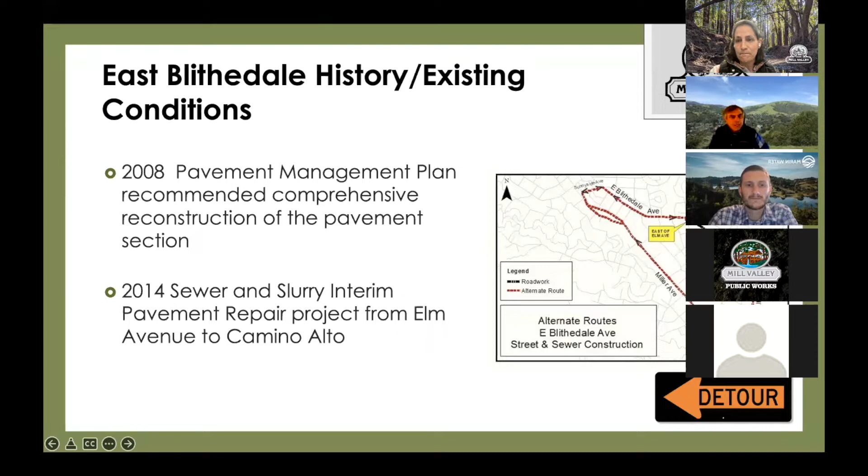I'd just like to give a quick background on Blithedale. Since 2008, the pavement rehab is kind of well overdue for repair, since the pavement program recommended at that time a full overhaul of the roadway condition on Blithedale. Since then, we only did some minor slurry rehab and some sewer work in 2014, and at that time traffic was also detoured for the project to Miller and did a complete detour. So that's it. Next.

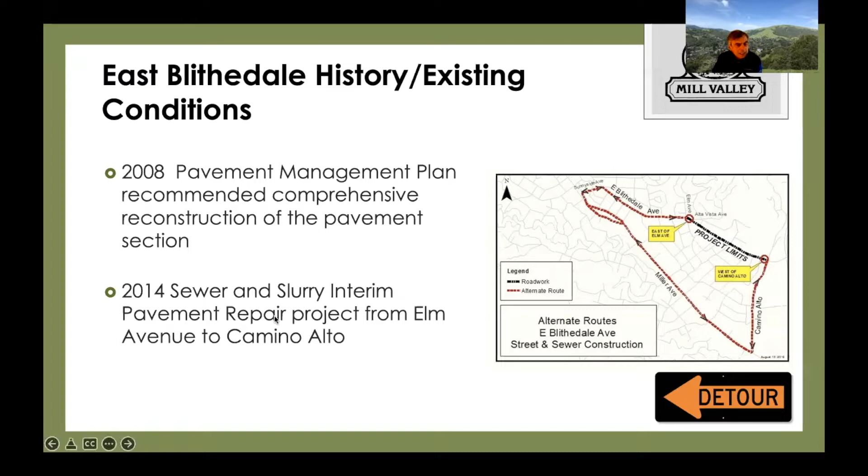The project in general is the Blithedale project, designated to be a complete street. We kept that in mind and used it as a guiding principle. The goal is to improve mobility for traveling in the Blithedale corridor, providing a safe and comfortable transportation system with more options for everyone, regardless of age, ability, ethnicity, or income.

In general, it includes pavement rehab, American Disability Act upgrades, new curb and gutter, sewer improvement, and pedestrian and bicycle facilities. The project will provide ADA compliant ramps, rapid flashing beacon crosswalks, wider sidewalks, bike lanes, street marking, and extended curb bulb outs similar to the downtown area.

On the bike route and the phases - I'm sorry, let me go back again to talk about the phases. I just want to talk about the project limits.

As you see in blue is the first phase of the project, which started last summer from Highway 101 to Amicita. All the underground work is substantially completed, and we're looking at paving in mid-May, overnight in the evening hours.

The second phase will go from Amicita to Elm, and the third phase from Elm to Sunnyside. We also included Sunnyside pavement rehab from Miller to Blithedale, as well as Sycamore Avenue from La Goma to Blithedale. So that's the limit of the project.

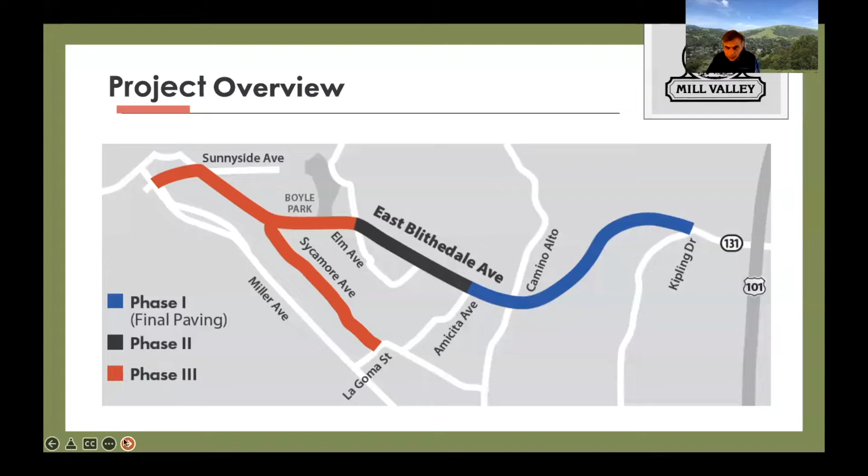So go to the next slide. As you can see, the project is basically almost like five projects included in one.

The first work that we see going right now in Blithedale is actually not a city project, but Marin Water District, who's been a great partner with us on this project. They are in the process of replacing the 100-year-old water line in advance of our paving on the roads, so we really appreciate that. They've gone through hoops to try to get the project going early before our project and get that going, so we appreciate that.

They are starting with our project and moving forward with that. In addition, PG&E is also a partner for this project and is looking at doing some work right now, potentially, which is not confirmed yet. They'll be looking at doing some pipe replacement from Elm Street onward, with a number of gas lateral services to be replaced. So we'll get more information on that soon.

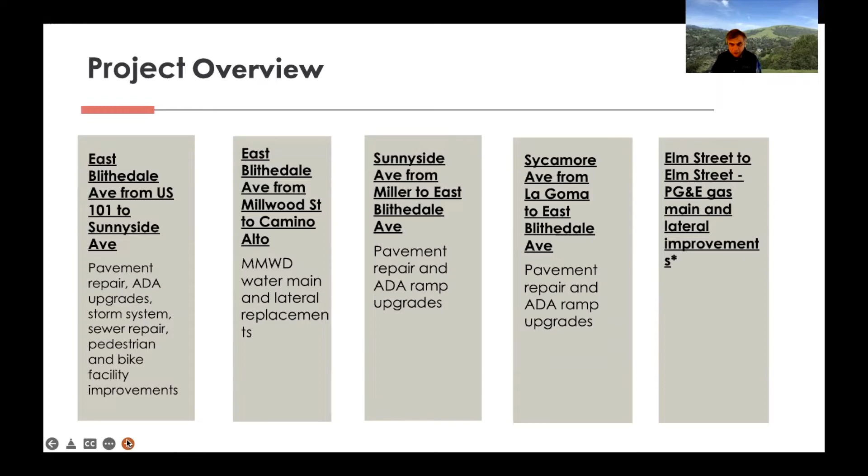Each of these projects has its own complexity and effort involved. But as far as the funding goes, we're grateful to City Council and TAM. They've provided a bunch of funding sources for the project, from TAM Measure A, to the sewer fund, to the recent bond refinance.

We have also secured a couple of grants, including Safe Routes to School grants and Safety Improvement State grants, as well as American Rescue Plan grants that the City Council designated for the Blithedale project. So the City Council is really putting a priority on this project and allocating a lot of resources to make sure it's successful.

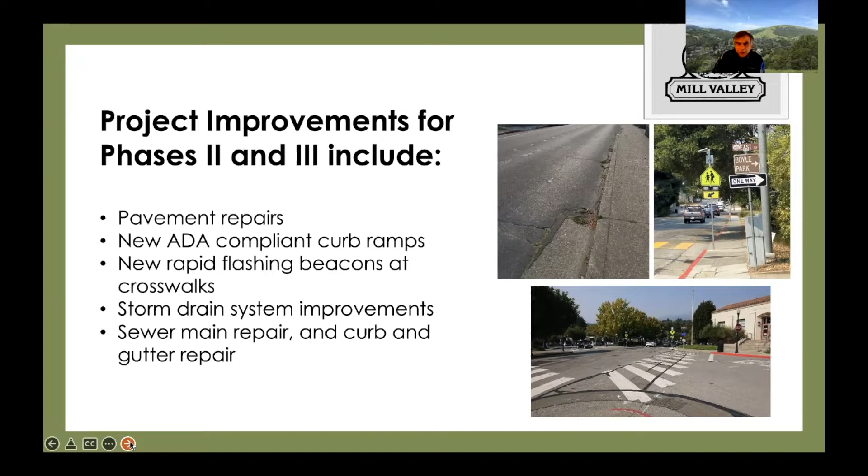The project, in phases 2 and 3, basically involves ADA compliance curb ramps, rapid flashing beacons, storm improvement, and curb and gutter work. From that, I'll give it on to Dan Blinkquist, who has been working for over a year now on our Blithedale project for Mark Thomas. He's a design engineer - thank you, Dan, for maybe giving people a little overview of what the final product is going to look like. Appreciated.

Okay, great, thank you, Ahmed. So what we're showing here is a small sample of really what the project involves. For the most part, the project is really at its core a roadway rehabilitation project - basically what's there is going to be reconstructed in order to extend the service life of the roadway, and then provide the associated changes to ADA curb ramps and drainage, and repair any damaged curb, gutter, and sidewalk that's evident along the corridor.

In addition to that, we were able to obtain a grant through the Highway Safety Improvement Program with Caltrans, which provided funding to do some additional improvements along the corridor at some of the unsignalized pedestrian crossings. This is showing several of those locations that are part of that improvement process in the downtown vicinity.

First and foremost, there would be an intersection with bulb outs and new rectangular rapid flashing beacons, essentially flashing light warning systems for pedestrians crossing at Sunnyside. Similarly, we would have those same improvements going in at the Mountain View intersection and at the Dell intersection. There are a couple other locations further to the east on the corridor where we're looking at bulb outs as well, at Thalia, at Catalpa, and at the Hillarita Mesa intersection.

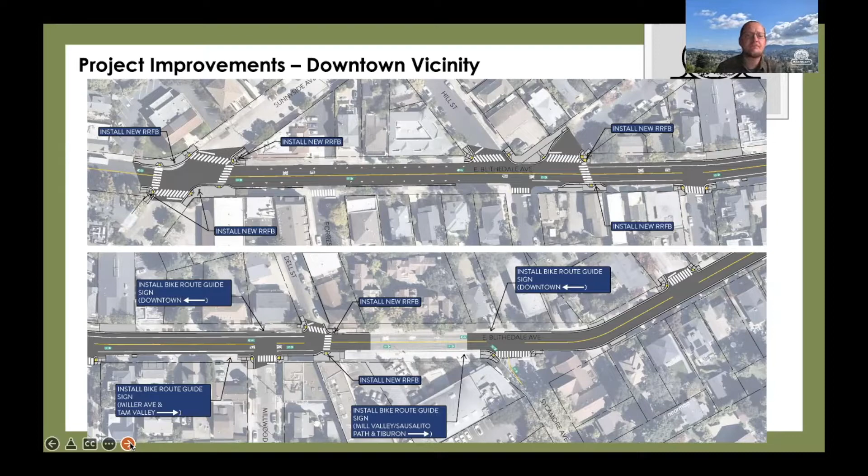I'll be touching base on our water component of this overall road rehabilitation project. Starting with the scope, we'll be replacing approximately a mile of 8-inch water main between Millwood and Camino Alto. In addition, we'll be replacing about 100 water services, 50 valves, and we will renew 6 fire hydrants as well.

So the benefits of this project are essentially twofold. As Ahmed mentioned, Marin Water prioritized this Blithedale pipeline rehabilitation project ahead of our capital program in order to replace the pipeline prior to Mill Valley's paving project. The benefit here is that the community will be able to realize the advantage of new underground infrastructure as well as a brand new roadway system. The second benefit is the original pipeline was installed in 1921, over 100 years ago, and so the new pipeline will be seismically resilient and more reliable for decades to come.

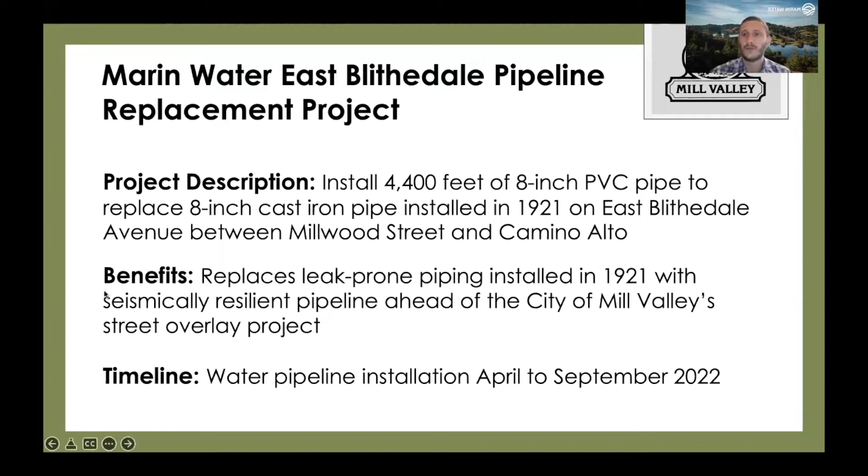The timeline of the water work is anticipated to go through August, pushing towards September. We're currently between Amicita and Camino Alto, and we're traversing westbound towards downtown. With that, I'll hand it off to Mike Janet, construction manager, who will speak to some construction impacts and traffic management, as well as the overall construction schedule.

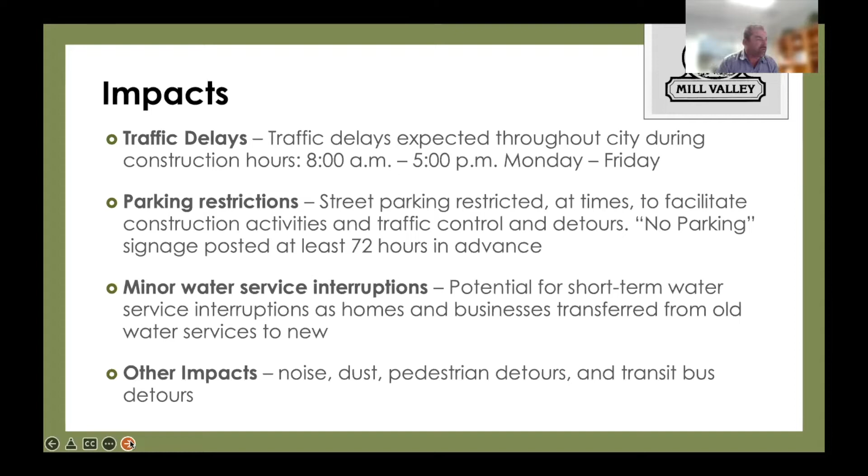Addressing traffic and noise impacts during construction: we've designated a portion of Boyle Park for construction staging, giving the contractor a close by staging area centrally located on the project. To the right in Boyle Park as you come off Blithedale, we're talking about temporarily adding parking on Thalia Street and putting up signs to direct the public to the parking, as we know Boyle Park is a very well used park that everybody enjoys.

We've talked about expanding daytime lane closures when school is out for the summer. We want to take advantage of school being out and not disrupting the school when we can, so we're working with our contractors to utilize that to the extent possible.

Night work will be done where feasible, with lower noise impacts for paving. We also reduce noise impacts by restricting loud activities, trying to get jackhammering done first thing in the morning to the extent possible, so it's not disruptive throughout the day. We're using low impact vehicle alarms when equipment is backing up, which still keeps the safety factor but doesn't travel like typical alarms. And we're reducing sound from our equipment by making sure maintenance is up to date, mufflers are appropriate, and everything is within specifications on the job site.

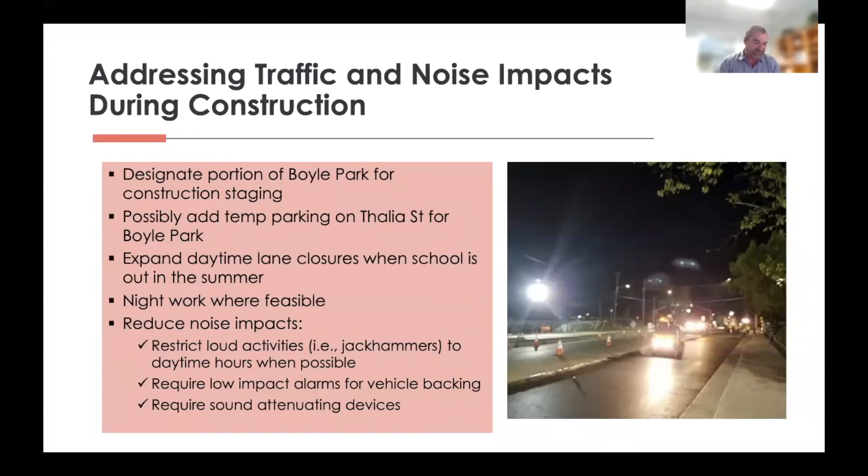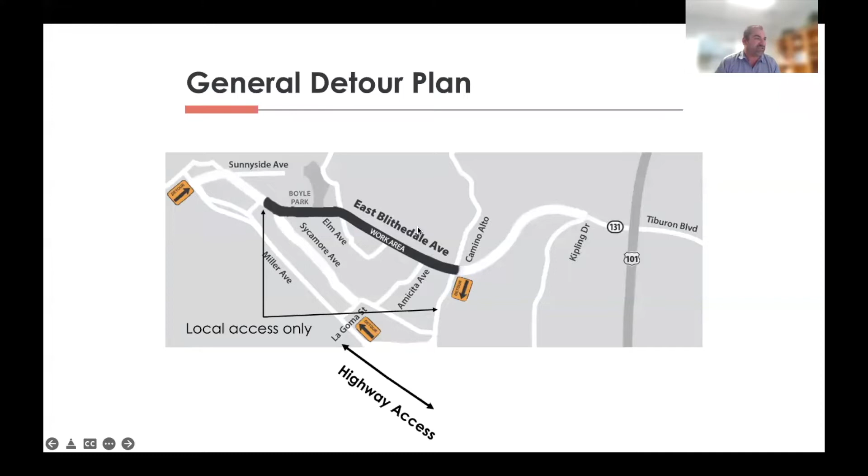This is the general detour plan. If you live in Mill Valley, you're probably pretty familiar with it at this point. While we understand there's a lot of traffic through this area, especially during morning and afternoon commute, we ask that you be aware of this and try to follow it to the extent possible. There is local access on each end of Sycamore for residents to get in and out and make sure you have access to your homes.

The traffic management plan: local residents within the closed roadway section are allowed within the local access area, along with garbage trucks, mail, and emergency vehicles, and they are allowed on East Blithedale. Most traffic will have to take the detour via Camino Alto to Miller to access downtown, Cascade Canyon, Homestead, Mill Valley Heights, and the library area. Residents of the Sycamore Triangle and Kite Hill, including the golf course area, will take a detour via Camino Alto and Sycamore to access their destinations.

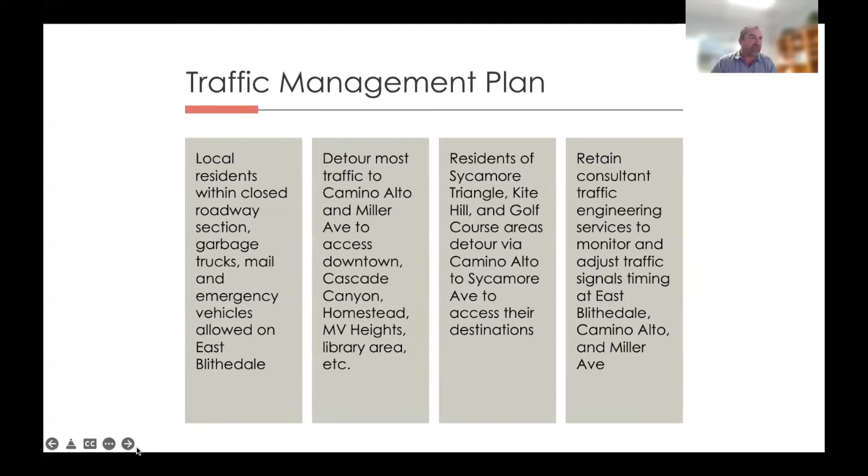We also retained a consultant traffic engineer to monitor and adjust traffic signal timing throughout the detour, including the traffic signal near 101, to make sure the timing lined up to the extent possible to keep traffic moving throughout East Blithedale, Camino Alto, and Miller Avenue.

Here's an overview of our construction schedule. MMWD has started work on their water line replacement, and Argonaut is working on Sycamore Avenue and will be working on Sunnyside. The East Blithedale paving phase 1 from 101 to Amicita will happen mid-May, followed by Sycamore Avenue and Sunnyside Avenue paving. Then June through September, East Blithedale sewer repair from Amicita Avenue to Sunnyside Avenue will continue, followed by concrete improvements on Sunnyside and Amicita, followed by a goal of paving Sunnyside to Amicita in spring of 2023.

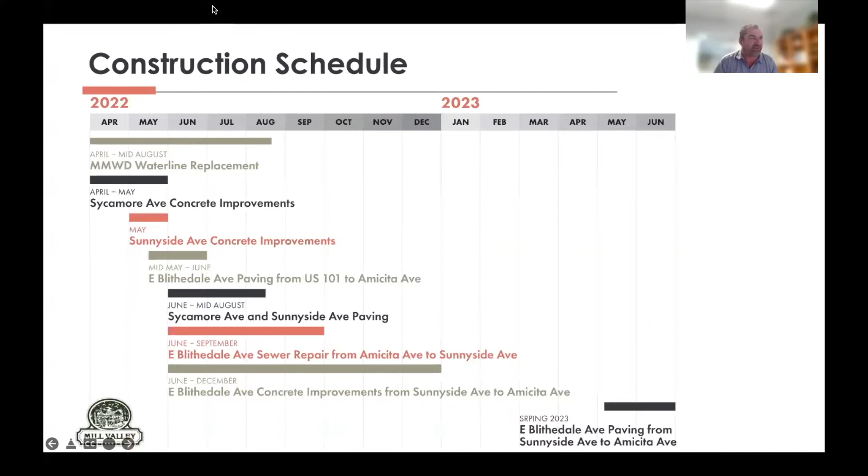Keep in mind, this is based on our contractor schedule, without any delays or unknowns at this point. As Ahmed touched on, we don't know exactly what PG&E's schedule is for the gas main replacement or what their actual plan is at this point, so that could add a little bit of time to our schedule. With that, I'll hand it back to Ahmed.

Thank you, Mike. Ahmed, before you start, we just got a comment that it's a little hard to hear you, so if you can get a little closer to the computer, that would be great. Thank you so much. Gotta raise the volume - I have a kind of allergy, sore throat, so I'll try to raise my voice a lot. Thank you, Mike, that was great.

For community outreach, we have quite an extensive outreach program going on, including bi-weekly project status and schedule updates. We try to provide all this information to the public. We've also been participating in and attending the Safe Route to School group meetings and the Bicycle Pedestrian Advisory Committee. Those meetings have been following along over the past couple of years, keeping people updated on what's going on with the project.